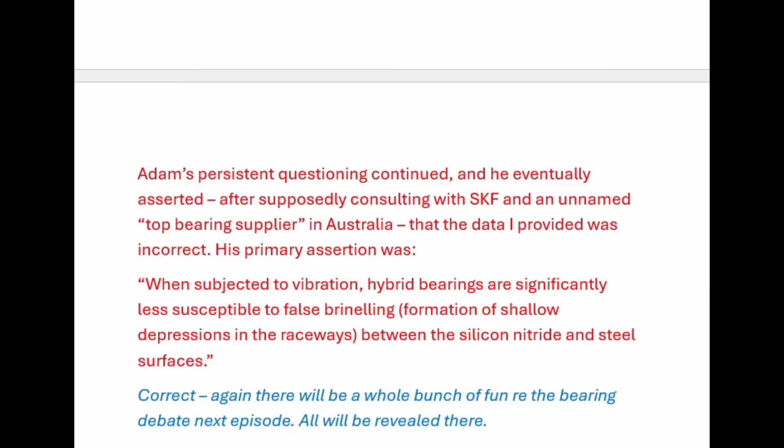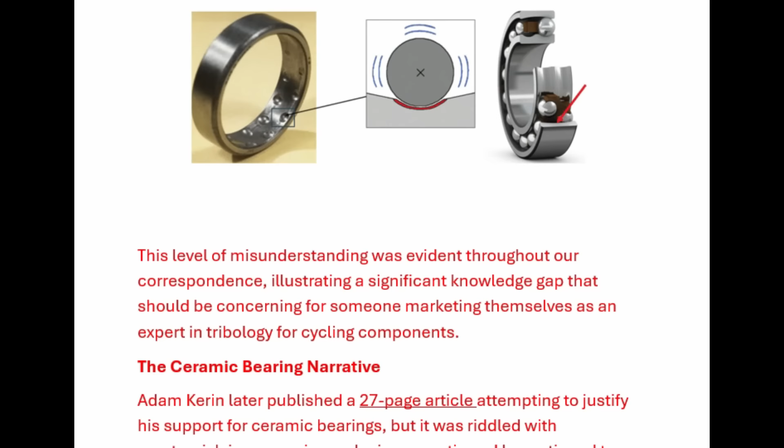Alrighty, we're up to here in his manifesto of BS that he's typed out. We're going to skip past a fair bit of this bearing stuff for the moment because I'm going to be doing a separate episode or episodes on his versus my bearing information and his bearing testing. So yeah, just basically stay tuned on this, otherwise it's just going to bog things down. However, things I guess are a bit relevant here just in terms of easily provable BS that he's put in this document. Alright, the ceramic bearing narrative.

Adam Kerin later published a 27-page article attempting to justify his support for ceramic bearings, but it was riddled with amateurish inaccuracies and misconceptions. He continued to harp on the supposed fishy marketing due to the lack of openly available information, failing to grasp the costs, standards are expensive, complexities, and proprietary nature of the data he was seeking. So again, this is Hambini hiding behind the fact that he's not willing to release how his bearing data was obtained or tested.

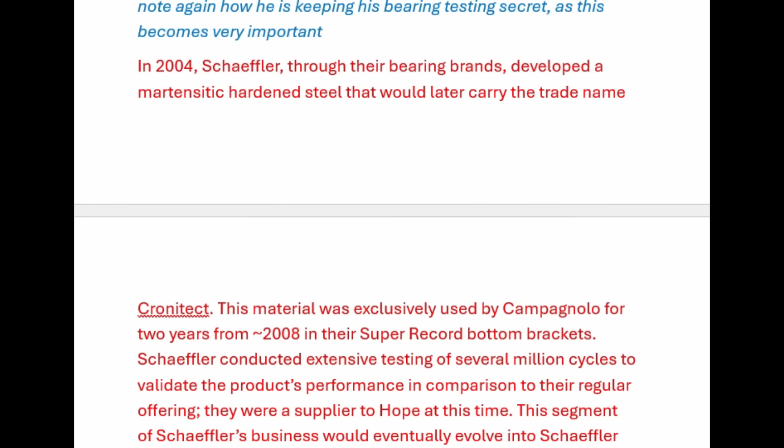In 2004, Schaeffler, through their bearing brands, developed a martensitic hardened steel that would later carry the trade name Cronitect. This material was exclusively used by Campagnolo for 2 years from 2008 in their Super Record bottom brackets. Schaeffler conducted extensive testing of several million cycles to validate the product's performance in comparison to their regular offering. They were a supplier to Hope at this time. This segment of Schaeffler's business would eventually evolve into Schaeffler Velo Solutions.

Alright, so we've got a couple of lines of just astounding BS to cut through there. The first one is, it's not like I would have been unwilling to purchase a test standard. Had he named a test standard, I would have gone and purchased it. There is no ASTM or other test standard for cycling bottom bracket bearings. So what was the test? Now, if it's Schaeffler's own invented test, their own proprietary test, because they have wanted to develop a segment of their business that is going specifically into cycling bottom bracket bearings, then if his data is from Schaeffler's proprietary test, that's a different point. And it's kind of interesting that I'm only hearing about that now.

Obviously, his data and information at the time should have referred to that this bearing test data is from Schaeffler's own proprietary bottom bracket testing. But interesting that that's just come up now, but also interesting in that how come then Schaeffler have used the test to develop hybrid ceramic bearings with martensitic hardened steel races, obviously now sufficiently hardened to be able to handle the rigors of running the ceramic balls.

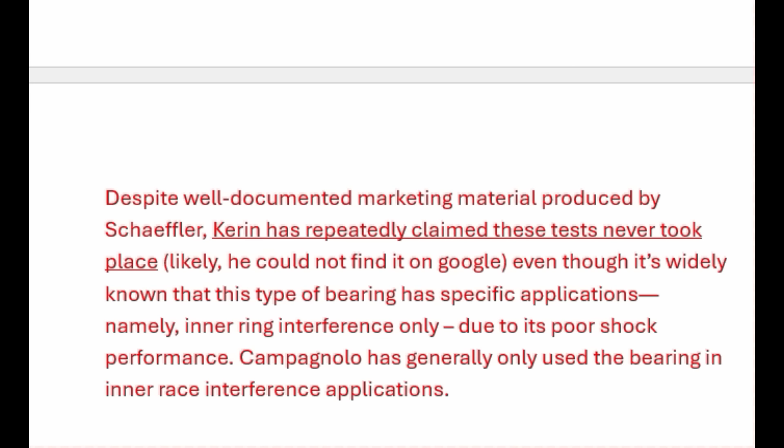Moving on. "Despite the well-documented marketing material produced by Schaeffler, Kerin has repeatedly claimed these tests never took place. Likely he could not find it on Google." Well, it would have been nice if he referenced it if that's the test he used too. "Even though it's widely known that this type of bearing has specific applications, namely inner ring interference only due to its poor shock performance, Campagnolo has generally only used the bearing in inner race interference applications." Yeah, so again, if he's ribbing me for not knowing of the Schaeffler testing, he should have put that in his presentation and information. And also in the discussion that we had back and forth all those years ago.

Possibly the reason why he didn't is because, why is he bringing it up? Because everything points to the fact that their testing supports my argument that hybrid ceramic bearings, as long as the races are sufficiently hardened, are amazing. They created apparently an entire cycling-focused division around their awesome hybrid ceramic bearings. So why is he using that in the argument? He's self-defeating his own points.

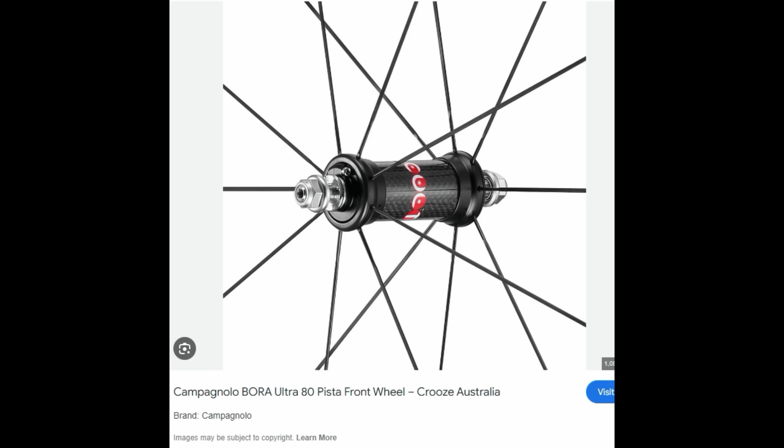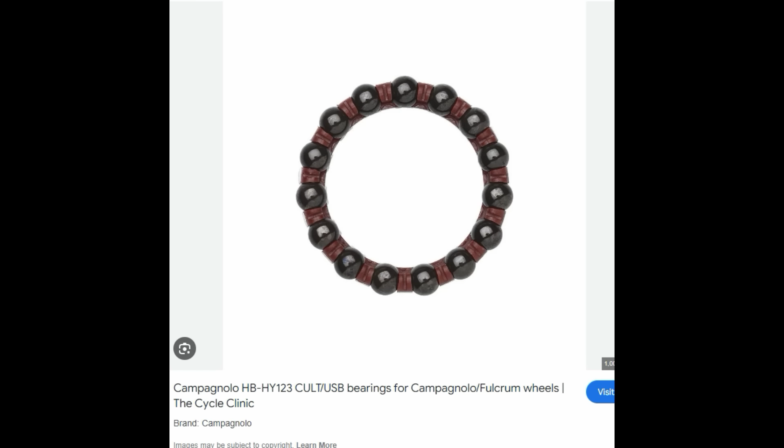And then to say that they only use them in inner race interference fit on, for instance, Campagnolo Ultra Torque cranks. What are these then? Let's have a look. What do we have here? We have a Campagnolo hybrid ceramic bearing hub using what they call their CULT bearings. These hubs using their CULT bearings have been out for I don't even know how long. So hybrid ceramic bearings by way of they have ceramic balls running on hardened steel cup and cones.

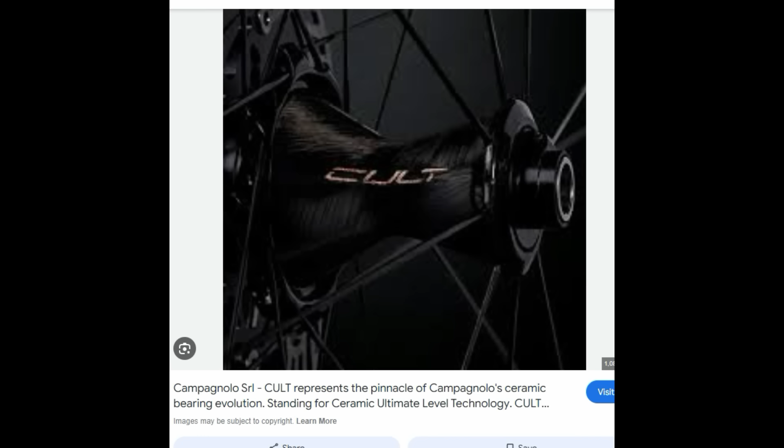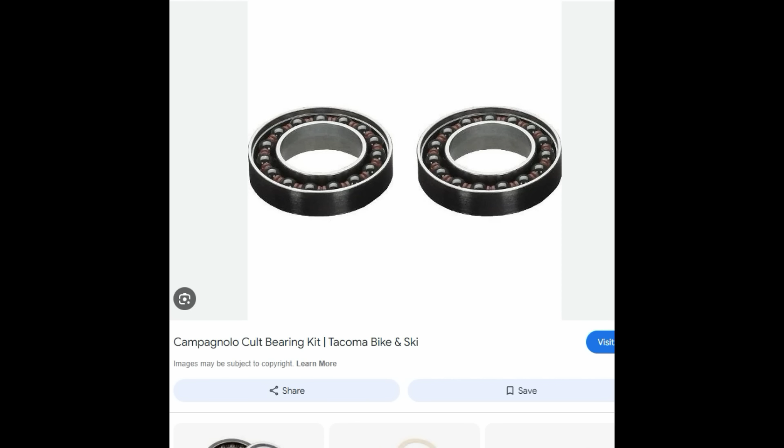So how are your CULT bearing hubs going if you have Campagnolo wheels, or if you have Fulcrum, which is a sister of Campagnolo? They refer to those as USB. So they are hybrid ceramic balls used on the same basic cup and cone hubs. So to say that they're only using such for inner race interference fits, such as their Ultra Torque cranks, is just, how much easily proved utter BS do you need with regards to him on the hybrid ceramic versus steel bearing front? It's a mountain.

So, a short summary on all of that, where he has been saying that hybrid ceramic bearings are unsuitable for uses in cycling, obviously in the wheel application due to vibration and shock. You can shove that right back up the clacker from whence it came. At the end of the day, as long as the hardened steel race has the sufficient dynamic load rating to not be damaged by the level of shock and impact that it's going to be subjected to in your cycling, it will not be damaged or indented by the very hard ceramic balls.

And there's a number of reasons why the hybrid ceramic balls will outlast. The balls are typically the faster wearing part within the bearing, and the balls are harder, so they wear less. The high quality ones are also smoother and rounder, so they cause less damage to the races over time, whereas steel bearings will wear the races at a greater rate due to the fact that they are less round and smooth. Steel bearings also deform more under high shock loads, and when they have some deformation, if they're not a very smooth round ball running on the races, they will cause more damage to the races. The very hard ceramic balls deform very little under the same shock load, if at all, and therefore protect the races from being damaged by still being round.

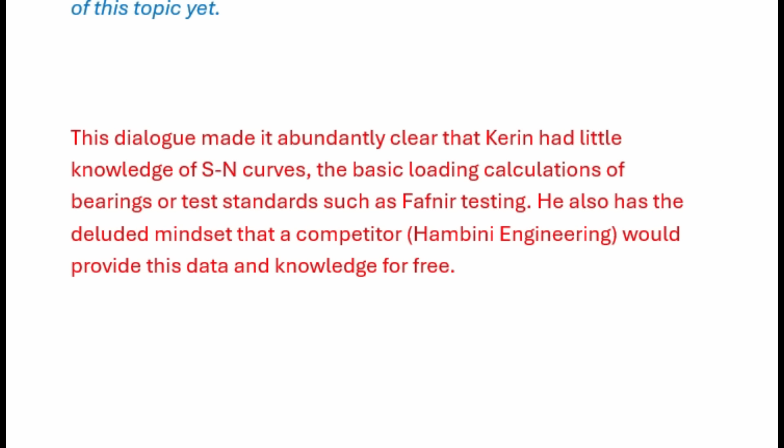So somebody who's looking to become a retailer of your bottom brackets, I do not believe is a competitor. Okay, back to the manifesto of BS. This dialogue made it abundantly clear that Kerin had little knowledge of S-N curves, the basic loading calculations of bearings, or test standards such as Fafnir testing.

He also has the deluded mindset that a competitor, Hambini Engineering, would provide this data and knowledge for free. I mean, alright, we'll go into more, not as a competitor, but as a retailer of his bottom brackets. But I just wanted to understand the data behind what he was pitching because I thought it was all pretty wild. So somebody who's looking to become a retailer of your bottom brackets, I do not believe is a competitor.

Okay, even basic calculations are wrong. Kerin's continued shallow depth of engineering extends further as he incorrectly states torque, turning force, times RPM equals power. This statement is fundamentally incorrect. Power is calculated as the product of torque and angular speed in radians per second for SI, not simply RPM. Even the most junior engineering students would recognize this basic principle.

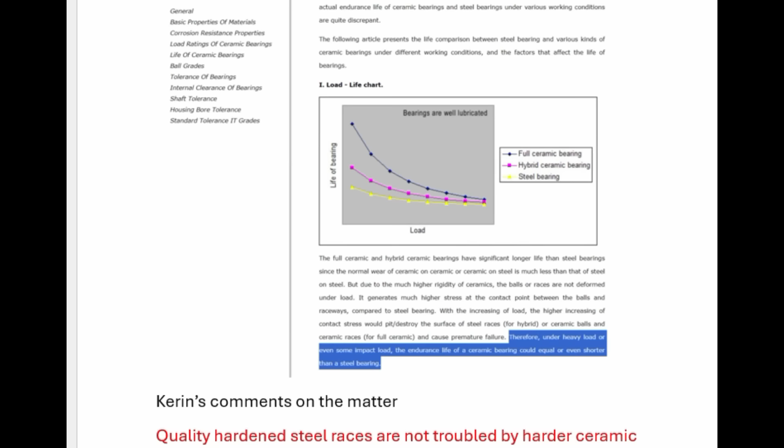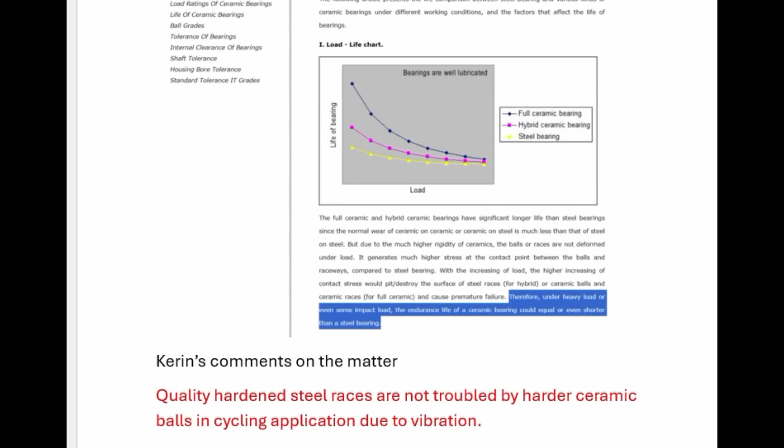A hybrid ceramic bearing being equal or even shorter than a steel bearing still has nothing to do with hybrid ceramics being an industry-wide con and being damaged after just 500 kilometers of cycling. So he's trying to use information that HSC have put out, out of context, and they sell just hybrid ceramic bearings, not steel. Wouldn't it be weird if they just undermined their entire sales strategy? So again, he's just doing a whole bunch of weird stuff to try to prove an unprovable point.

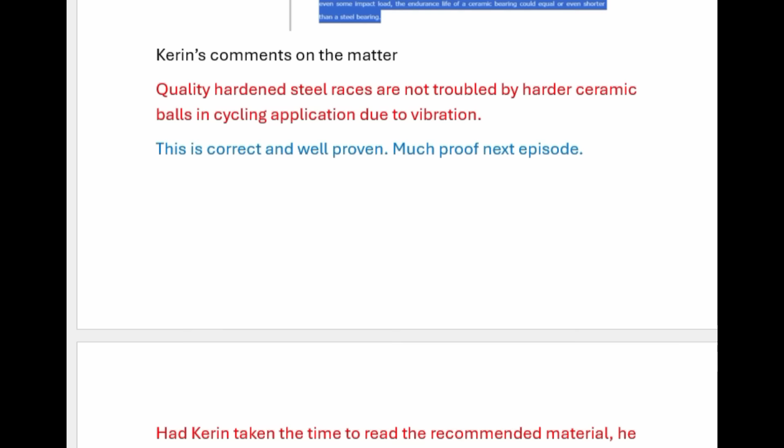Kerin's comments on the matter: quality hardened steel races are not troubled by harder ceramic balls in cycling application due to vibration. Yes, correct. Much proof in the next bearing episode. Had Kerin taken the time to read the recommended material, he would know the difference between brinelling and false brinelling, and again, blah, blah, blah. We're going to cover all that when we get to the bearings, but that's all rubbish. He would have also understood why plastic cages are a poor choice for highly loaded bearings.

All right, what do you call a highly loaded bearing? And loaded in a way that it's putting stress on the cage. The cage is there to maintain separation of the balls. So sometimes a certain strength of cage is needed to ensure that the balls are going to be separated. That is not the case in cycling.

We just do not put what he is calling highly loaded, in the context of stresses on cages, which is why just about all of the high quality bearings in cycling, be they hybrid ceramic or even the higher quality steel... So above a certain level, Enduro will move from a steel cage with their ABEC 3 level bearings to a polyamide cage in ABEC 5 very, very quickly, because, we're going to cover all this properly, but since we're just on this mountain of bullshit.

For cycling, and this was confirmed by a very large independent bearing manufacturer, in cycling it is very likely that the lubrication level within the bearing will reach a low level, because we are typically fairly slack with regards to our re-grease maintenance. There is vibration in cycling. The last thing you want is a steel cage when a bearing is going to be subjected to a low lubrication level and vibration. It is just bad, versus the self-lubricating polyamide cages.

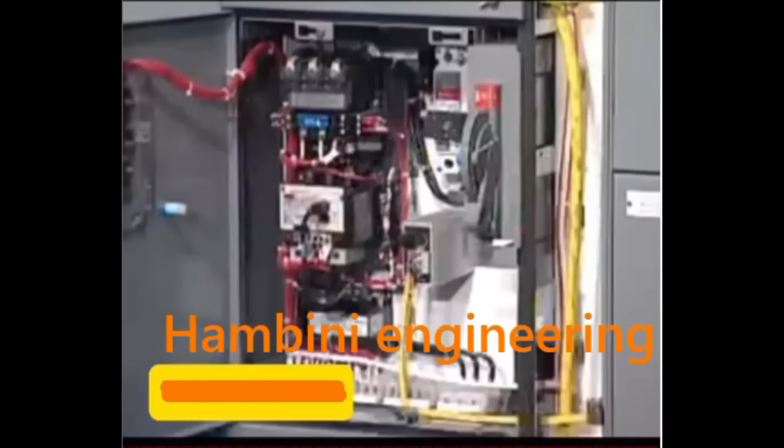Basically, the only new principle involved is that instead of power being generated by the relative motion of conductors and fluxes, it's produced by the modial interaction of magnetoreluctance and capacitive diractance. The original machine had a base plate of prefamulated amulite surmounted by a malleable logarithmic casing in such a way that the two spurving bearings were in a direct line with a pentametric fan. The lineup consisted simply of 6 hydrocoptic marzlevanes, so fitted to the ambifacient lunar waneshaft that side fumbling was effectively prevented.

The main winding was of the normal lotus-o-deltoid type placed in panendermic semi-boloid slots of the stator, every 7th conductor being connected by a non-reversible tremie pipe to the differential girdle spring on the up end of the grammeters. Moreover, whenever fluorescent score motion is required, it may also be employed in conjunction with a drawn reciprocation dingle arm to reduce sinusoidal depleneration. The retroencabulator has now reached a high level of development, and it's being successfully used in the operation of milford trunnions. It's available soon.

Perfect summary of what has been in Hambini's document so far. Thank you for bearing with me for episodes 1 and 2 if you've made it this far, and I look forward to episode 3. We actually get to talk about ZFC.